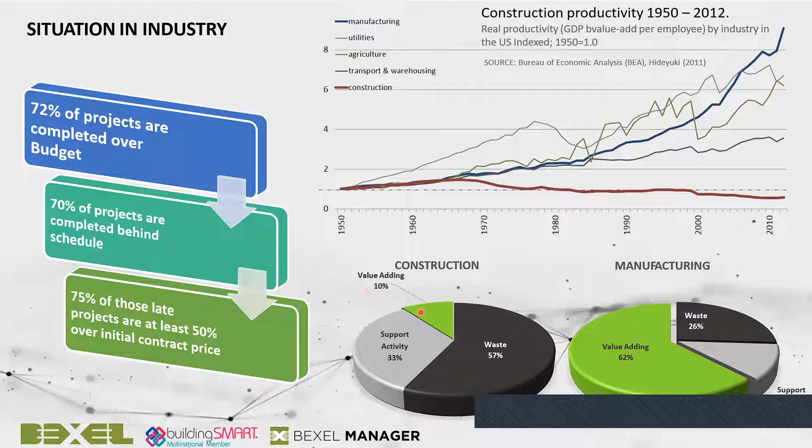If you see in terms of value addition in manufacturing versus construction industry, the value addition in terms of construction industry is just 10%. I'm saying about the intrinsic value, not the economic value here.

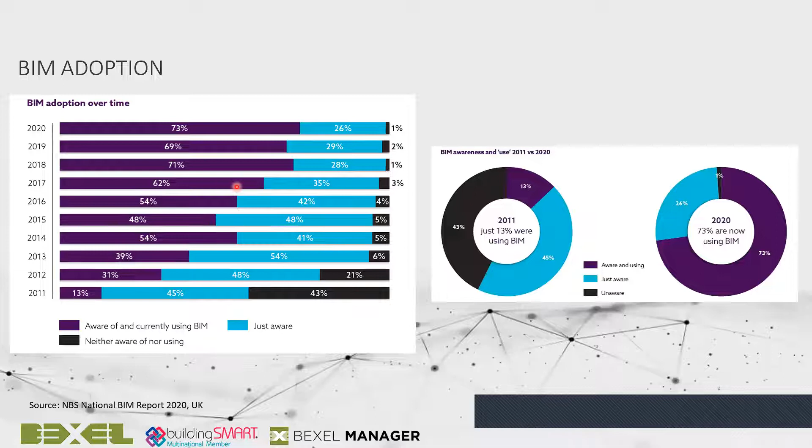Summarizing my initial introduction on what is the current scenario in industry and why digitalization, all those slides we covered are giving you insight into the current scenarios.

So what is meant by open BIM? Right now you have a multitude of softwares, and communication between one software and another has become very difficult these days. Building Smart has come up with a revolutionary format, IFC, Industry Foundation Classes. Across different tools, you can use this format to communicate in terms of the 3D model, schedules, or any other information pertaining to the 3D model. That is the idea of Building Smart - they want to standardize the construction industry in the long run.

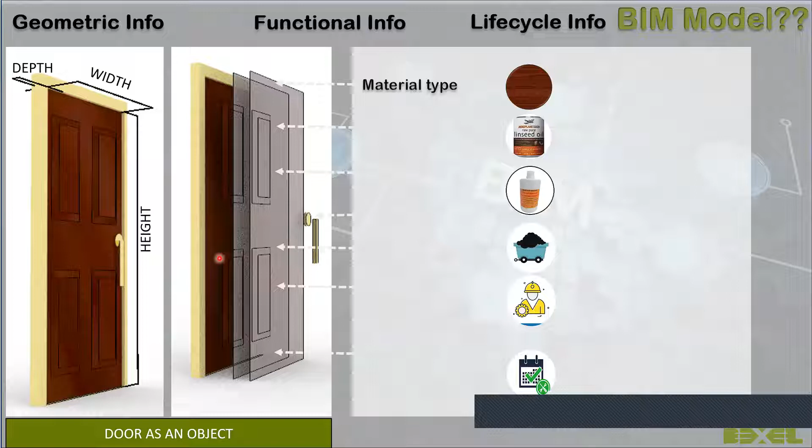With that, let me now jump to the software itself. Rather than just explaining in terms of slides, I feel it's better to go to the Bexel Manager software and explain there. We will be coming back to the slides again, whenever I feel it's done with the software. So this is a sample model.

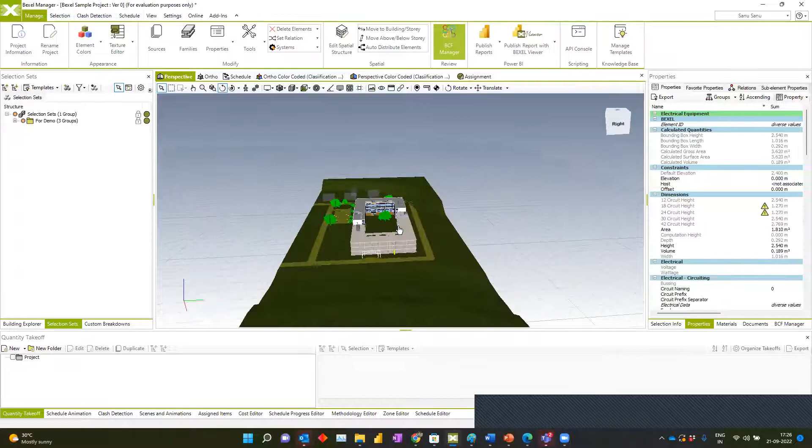Most of the time you've probably been fed up seeing this model - whenever you see any Bexel Manager demo, this model is shown, so kindly bear with us. Right now I'll just try to summarize the basic features of Bexel Manager and explain the intelligent scheduling part.

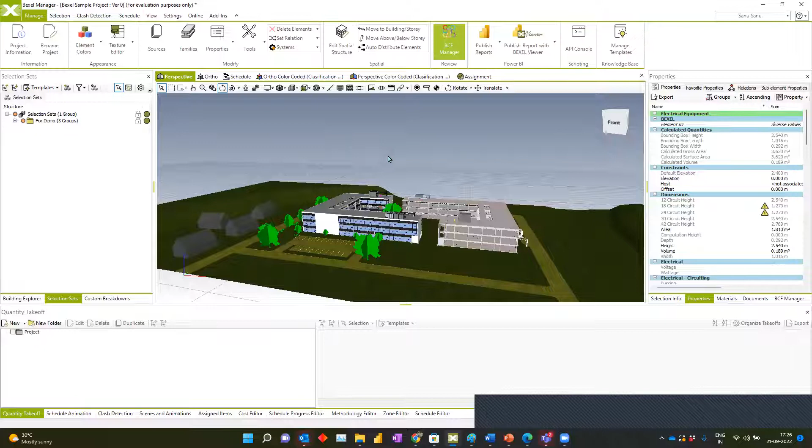So first of all, once you bring the model, what are the current formats that Bexel Manager can adopt? The basic formats are Industry Foundation Classes, IFC, and .bx3 files.

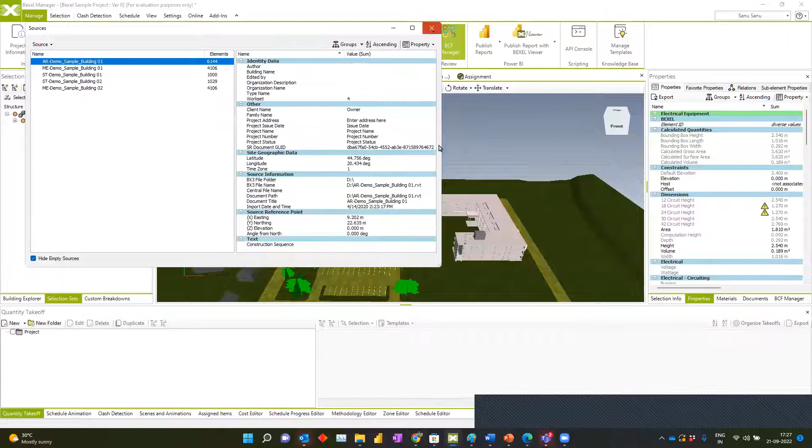Whenever you receive any 3D model, you can get a summary of all the files you receive here. All these are from Revit, extracted from Revit. Once you receive these, you can see all the source files - structural, mechanical drawing, architectural drawing. All these are present in the source file, so all the information or aspects related to the 3D model can be seen here.

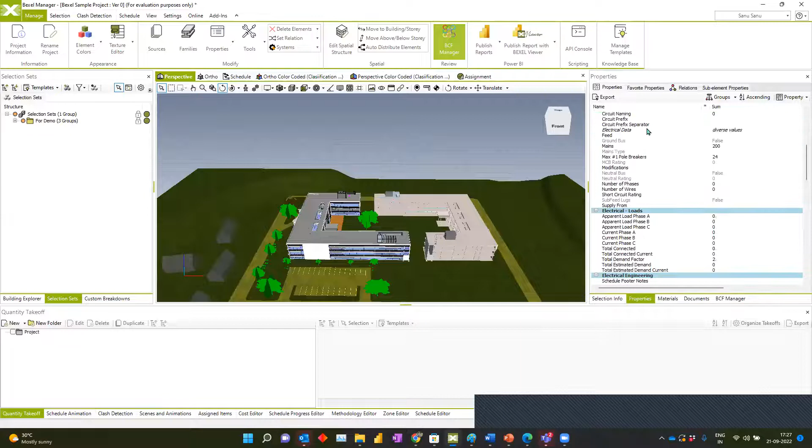Another important thing you need to understand in Bexel Manager or any other BIM tool is the properties - the 'I' of BIM, the building information, that information part. If you click on any particular element, you can see the complete history of that element, right from the time it is modeled to whichever stage it is taken to in construction or in the project. All this information is grouped under different groups, and you can see certain parameters here and a value for those parameters.

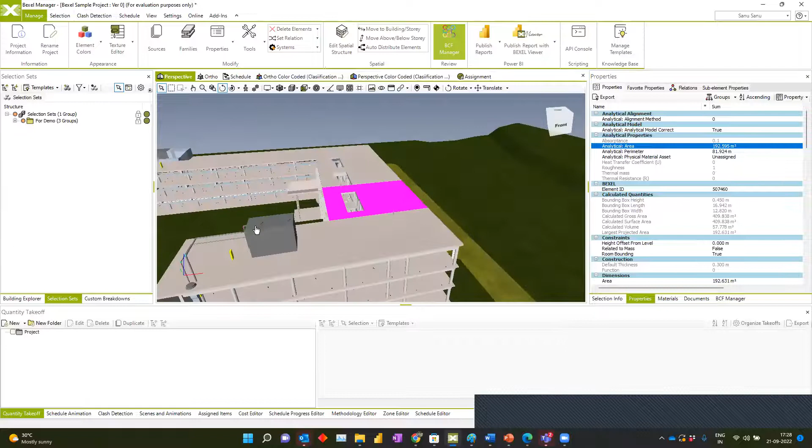This is why we say this is a building information model. You are punching in information to each and every model, whatever model is there, and you can see the information corresponding to that. It can be functional information, dimensional information, or any type of lifecycle information. All that information can be punched into this particular model.

So where is this information punched in? In the 3D modeling authoring tool - you have Revit, you have Civil 3D, those are modeling tools. The 3D modelers, when they model, follow certain criteria and standards, and also specific information needs to be punched into each and every element. Once you get this model, you can retrieve all this information here in Bexel Manager and do all the analysis with that data.

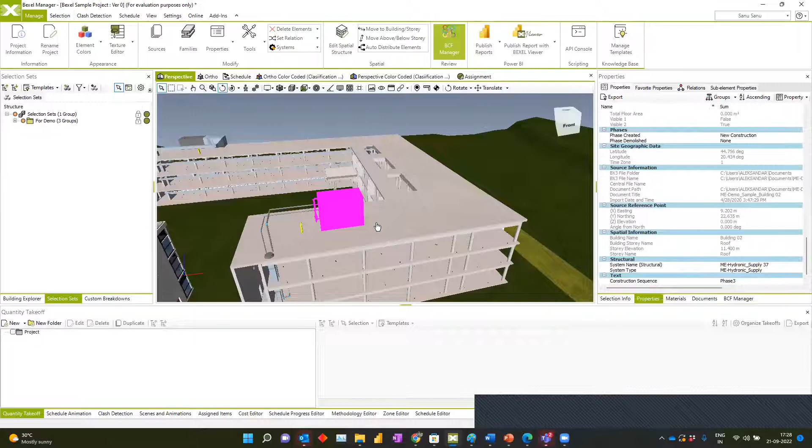Not to say less, we can also add this information in Bexel Manager. For example, if I want to add site construction related information, or structural related information, or any sort of information which adds more data to the 3D model, I can add it in Bexel Manager. That's one of the important things to understand - what these properties are and how you can use them to manage your construction.

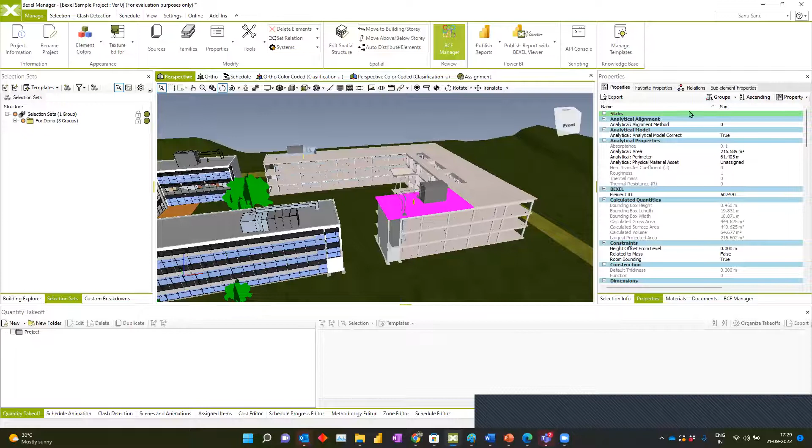Because say you want to take a quantity takeoff - what information will you use? When I click on the slab, I can see some dimensional properties. These are informations I can use to take the quantity takeoff. Say I want to take a clash report - what information is required? I may need the coordinates of this 3D model, the offsets from this 3D model to another element. All this information is what I make use of to create different outputs using this Bexel Manager tool.

Now coming to the other part - I think you already have clash detection, the quantity takeoff. Most of these parts have already been covered in the last two sessions, but however, I will just take an overview.

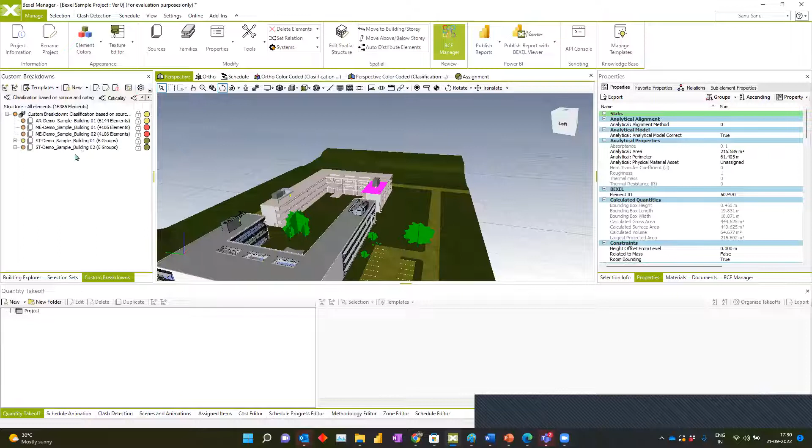Custom breakdown is nothing but a hierarchical breakdown of your 3D model. Say you want to divide this 3D model into phases or levels, like floor 1, floor 2. You can easily create a custom breakdown for level-wise information and create that particular scenario here. Custom breakdown creates a hierarchical breakdown based on the parameters.

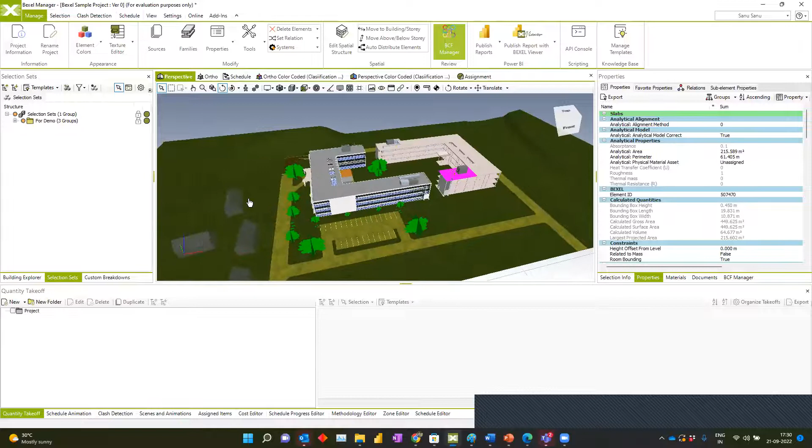Similarly, you have selection sets, which we will explain in detail just now when we create the intelligent schedule part. And similarly, we also have our costing part - this is another important aspect. In any construction, you want to deal with the bill of quantities, which is nothing but every item of your work listed down in line items, with a quantity.

So just like this, you are having a cost, you are having a quantity, and you get the total cost. It's nothing but unit rate multiplied by the quantity to give you the total cost. So on that line you get a bill of quantity.

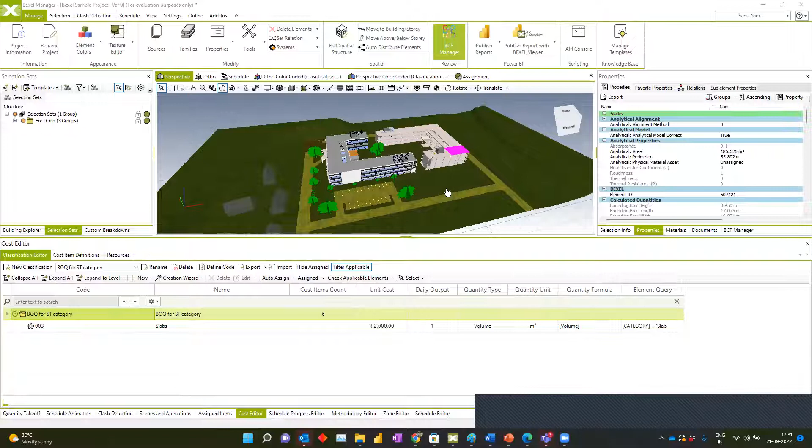In Bexel Manager we are having a very intelligent system for costing, and all these are integrated with the 3D model. So if I click on one 3D model, I can see which items are linked - if I click on a slab, right now it's showing the slab. So that sort of integration is happening between the 3D model, and that's why we call this an integrated 4D 5D BIM platform. You have the 4D connected, you have the schedule connected to the 3D model, everything is interlinked here.

Coming to the schedule animation, we will explain once we create that intelligent schedule. Also at the end, I will explain regarding the outputs in terms of Power BI, the dashboard that we can get from Bexel Manager.

So let me try to start with the intelligent scheduling. I will give you a glimpse of this scheduling feature - one of the unique features of Bexel Manager that you can't get across any other BIM-based tool, I will say.

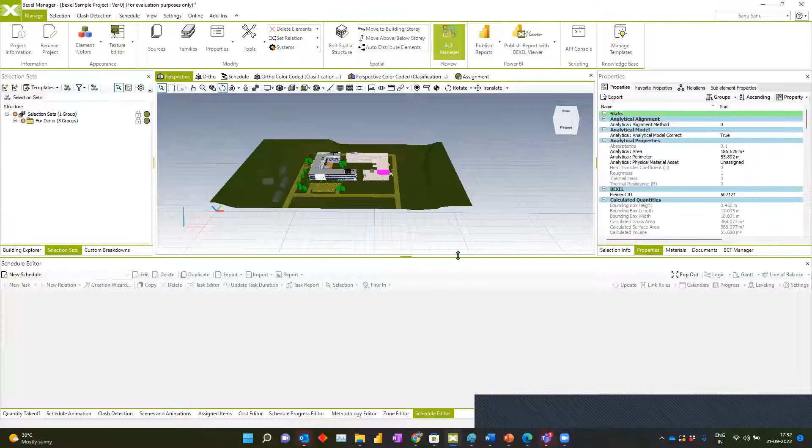So what you can do is use the 3D model to create a schedule just by defining some rules. For that, you require some parameters that I will explain. Ideally, in the traditional methodology, you have some tools out there in the industry like Primavera, MS Project, Asta Powerproject - all these are traditional tools which help you create a schedule.

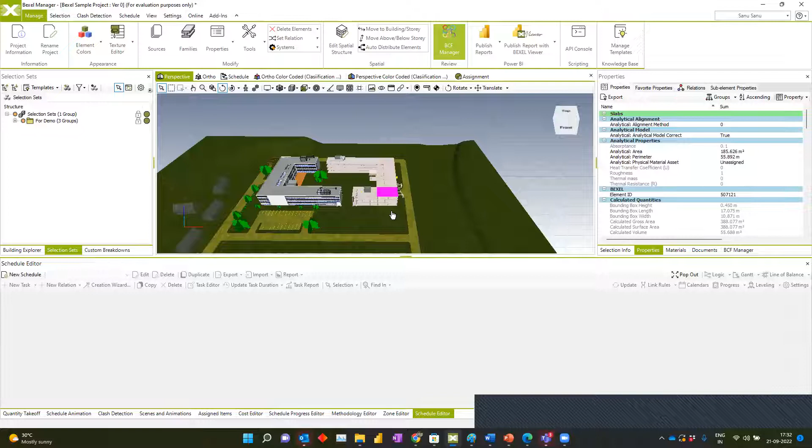But the methodology they follow is that whenever any project is there, they sit across and use their experience - that is one important thing. They put across different data like GFC drawings, CAD drawings, they interact with or use previous experience, previous projects, and put down a complete project. The main drawback of such a scenario is that it may take almost 1 to 1.5 months to get a detailed schedule for you.

But with the help of BIM models, you can generate this in less than, I will say, 2 days or 1 day, depending upon the complexity of the project. Here I will show you how you can create a schedule in just 15 or 10 minutes. So let's start that process without talking further.

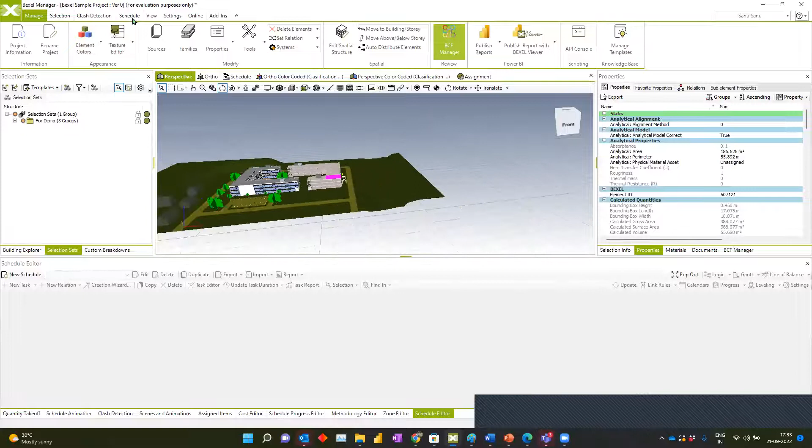So if you come here, this is the intelligent or rule-based scheduling module. You can see two things here - one is zone and one is methodology. These are the two inputs that you need to specify to the system to get that output - you are having zone, you are having methodology.

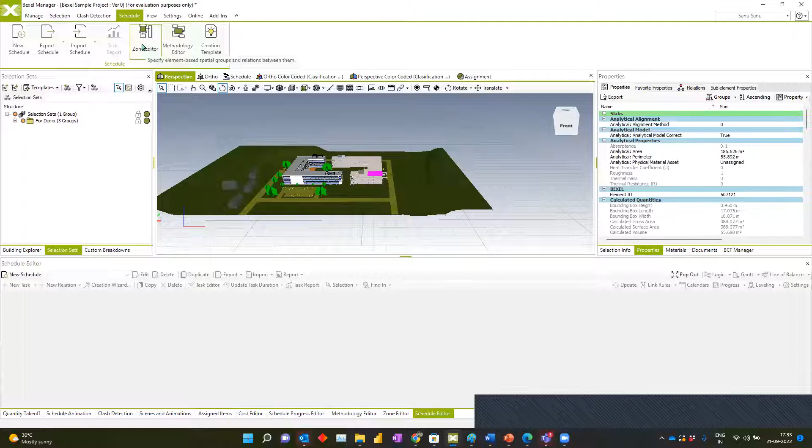So what is meant by zone? A zone is nothing but where construction is happening. For example, in this project, this is level 1, this is level 2, this is level 3, this is level 4 - so I can say that this is a zone. I can say that my construction at the moment is happening, this slab at level 3 is being constructed. So whenever I say 'where', that is where zone comes into picture.

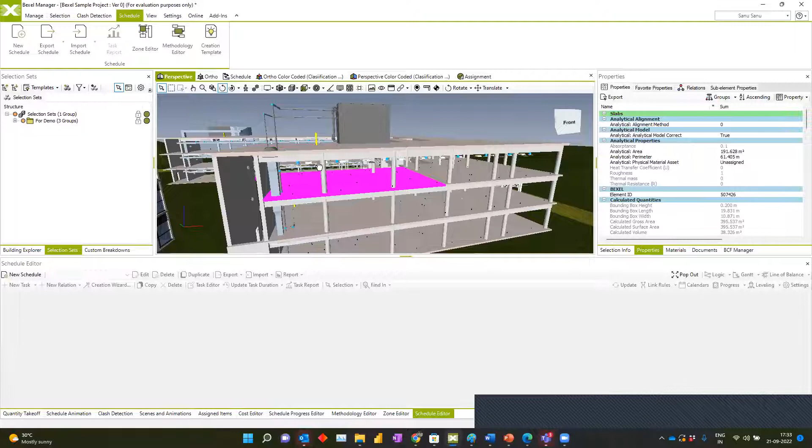So here I can say there are two buildings - building 1 is one zone, building 2 is one zone. I can also say this is phase 1, phase 2, phase 3 - so there are 3 phases also, from here to here. So you are having 3 zones here. But across the project, the zones can be different - there can be pour sequence, there can be construction sequence differently. For this sample project, we have divided this into 3 zones: one is the building, one is the zones, and one is the levels or phases.

How can we now create these levels and zones here? I will show one example, and from that you can get the logic of how we are creating that. For example, now I want to segregate out all the structural elements from this model.

So how can I do that? I just click on one element and see what properties are defining a structural element here.

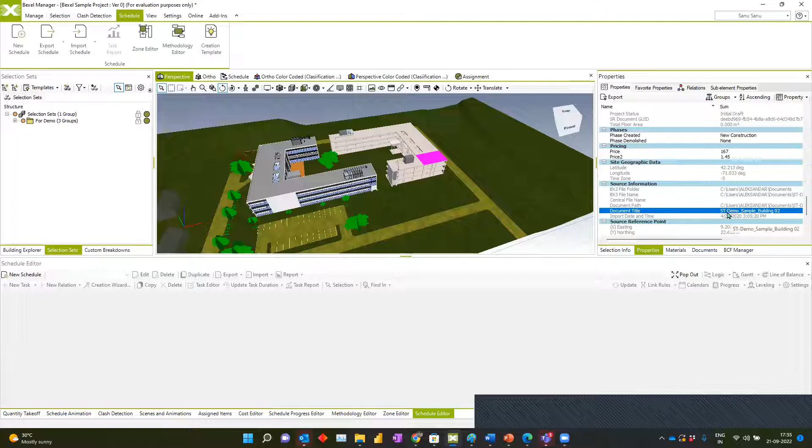Based on our experience, whenever we see a document title, like here it says structural demo sample building, whenever we get a Revit model or 3D model, ideally it's divided into structural, architectural, mechanical, etc. So in the document title itself, you get a property to filter out all the structural elements.

So how easy it is, I'll show right now. You can create an element query, go to element query, and this is nothing but calling out elements using a query. Query is something you give to call the elements. So I'll give some property value here.

What property did we just see? Document title. So I'll give document title, a text-based property, and say it contains ST, or begins with ST, because this document title value begins with ST.

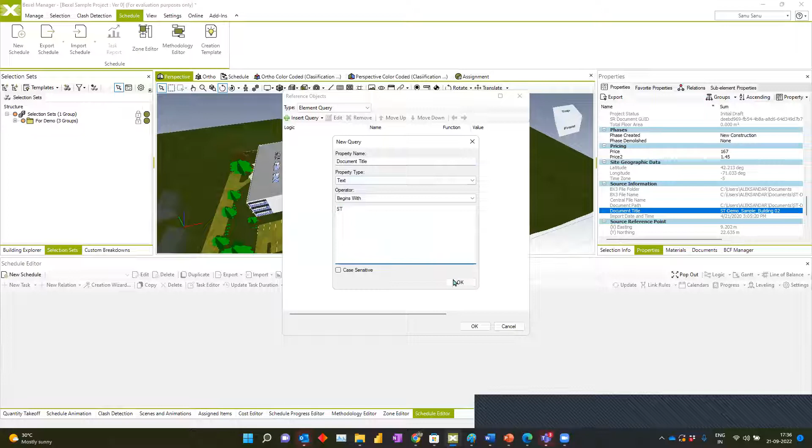So we are saying, filter out all the elements having a property called document title which is starting with or beginning with ST. I'll click OK. Right now itself you see 2029 elements are being selected.

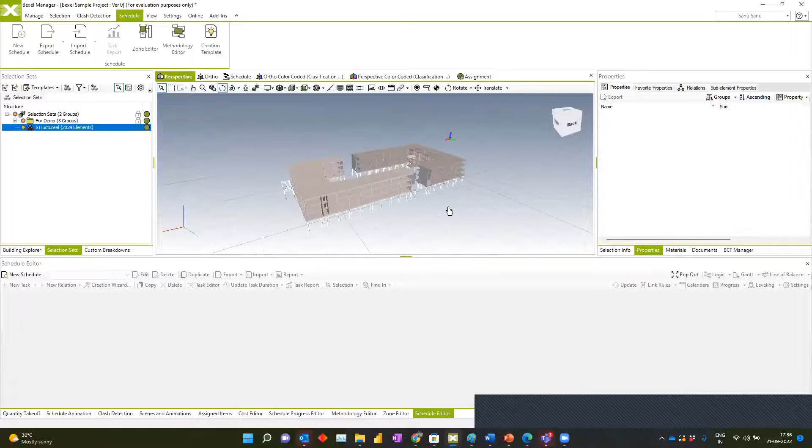I'll give this name as structural. So we created a selection set called structural. Forgive me for the naming, but if I select and isolate that, I can see the structural elements only in my 3D model. This is how you filter out or divide your 3D model based on information.

Again, I'm saying the importance of information in BIM, that information lies here, like all the data, everything lies in this part.

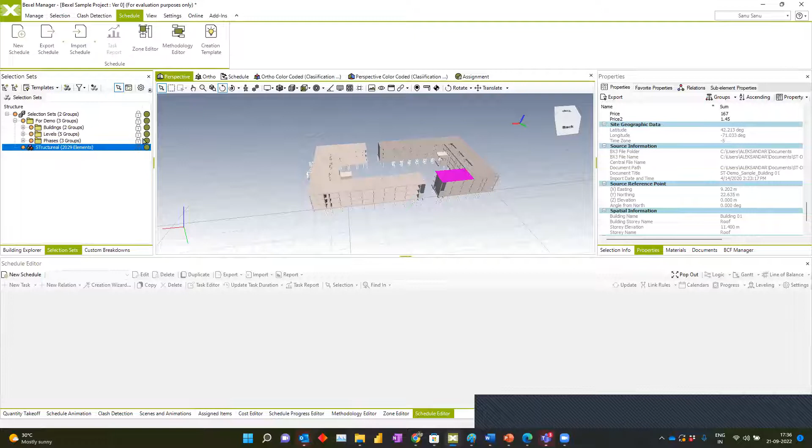Just like this, I created other zones automatically on similar lines. If you see, I've divided all the structural part into building 1, building 2, and the levels into entry level, sub level, floor 1, floor 2, all this level or floor information. Similarly, phases also, like phase 1, phase 2, phase 3.

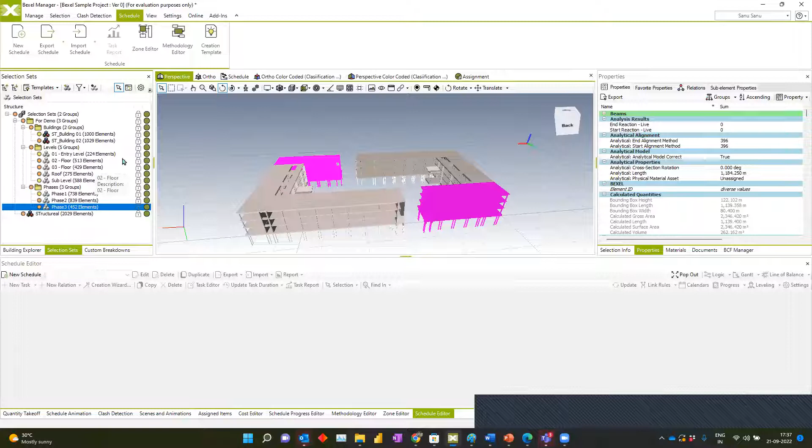So all these are informations, like the zones, that you can enrich into the 3D model, because we require this for our construction scheduling. So what you're seeing is BIM based or model based scheduling right now, that's why we are specifying all this in the model initially.

So next, now that zone is completed, what we require is methodology. Methodology is nothing but how we construct, or how we are going to construct.

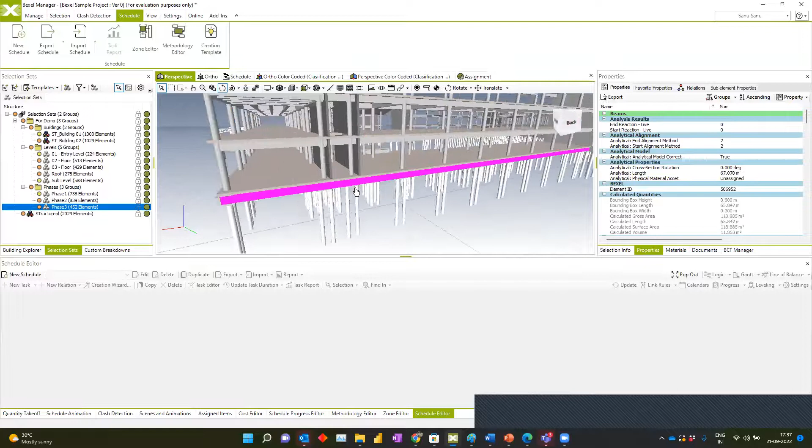Say you have the structural foundation, piles, then beams, then columns. Ideally you should construct the structural foundation first, then go for the plinth beam, then the slabs have to be casted, then the columns again. I'm saying this on a generic level, there can be more activities, but for this webinar, this is how it goes, and we are now specifying that work item.

Where do we get this methodology information? In all construction projects, there will be a BOQ, bill of quantities, which specifies all the items of work against the quantity. So on that line, we have to create a BOQ in Bexel Manager using this 3D model, and that is also very easy.

Come here, go to quantity takeoff, take a quantity takeoff easily. What I'm doing is taking the structural elements right now, I'll bring all the structural elements, do a very basic classification, group everything based on category, beams, columns like that, and I will give a quantity called volume here.

So I'll just name it structural BOQ, something like that. Fine, press OK. So now you are having all the items under the structural model. So you are having beams, roofs, slabs, structural columns, walls - all the things are listed down here. Perfect. So now you have quantity.

So what else is required for a BOQ? I said that BOQ is a combination of the quantity and the cost. So now you need some cost also. So where will you get that? You have to now come and create a BOQ, a bill of quantity, I will say. It's also simple - like right now you already created the BOQ or the quantity takeoff, so from there you can automatically retrieve the items and just punch in the unit rate. So I'll just sample a BOQ.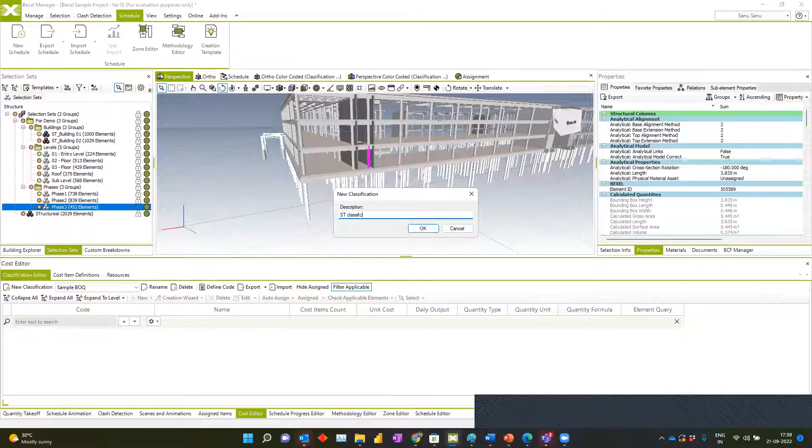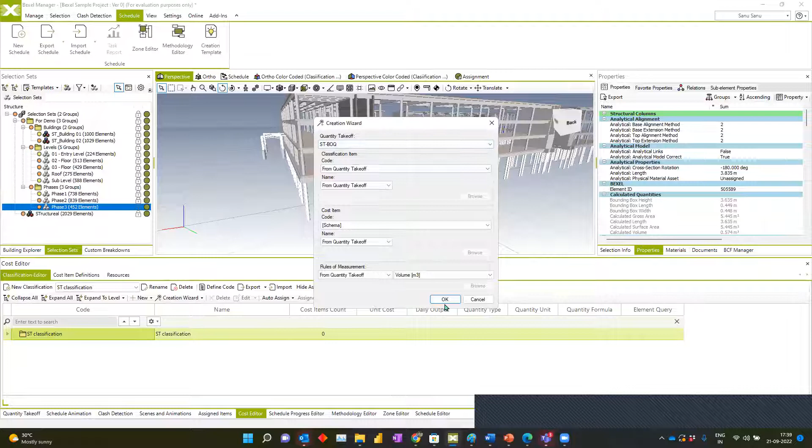So I'll just bring a new classification. I will name it structural classification. Fine, so now I will just bring that quantity takeoff that we just created right now - STBOQ, this is what we created now. So all these features, don't worry now, later you can understand what all these are. Just press OK, so now you can see all the items of work are listed down here.

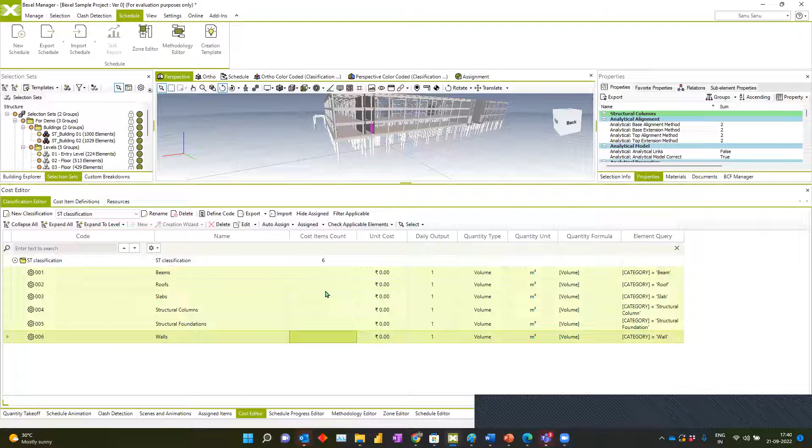So now what else are you having? You are having that quantity information here - volume, meter cube, etc. You can see element query. You can also see a column where you can punch in the rates for the items. So let's just give some dummy cost for now, say something like 2000, just like that.

So what all I said is required for a BOQ - you need a cost, you need a quantity. Quantity already we got from the quantity takeoff, so that's why these quantity formulas are there. Right now we gave just a unit cost also, so right now we are just assigning it.

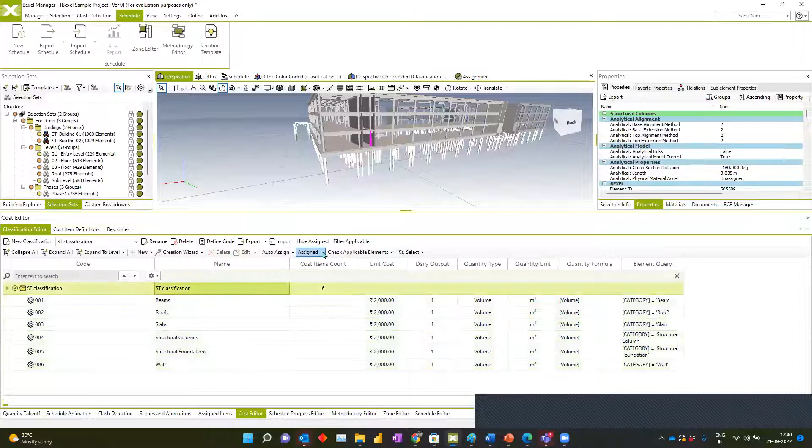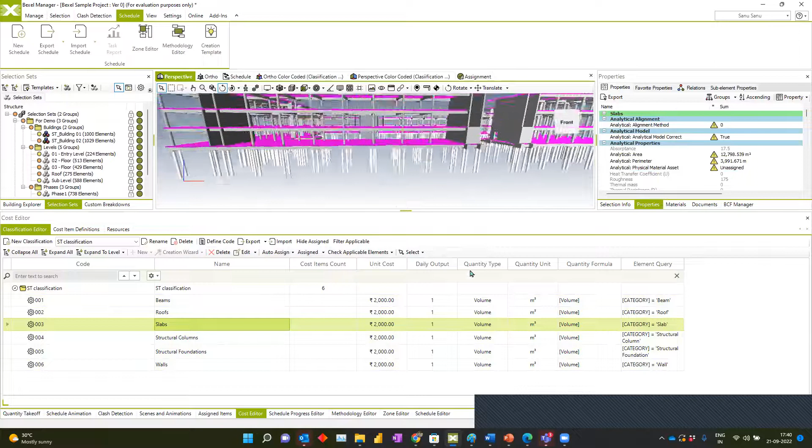So assigning means nothing but you are now converting these queries to the element. Like you are saying, okay, slabs is there - so once I assign, I can identify what element it belongs to. So if I go here, select applicable elements, I can see that all the slabs are now selected. Similarly, if I select any columns here and select filter applicable elements, the columns will be selected right now. So this is the integration that I am talking about - why we say that we are an integrated 4D/5D BIM tool like this Bexel Manager.

So now we got two things that are required - one is the zone, we created the zones here, and now we got the methodology also. So now let's just go and make that schedule.

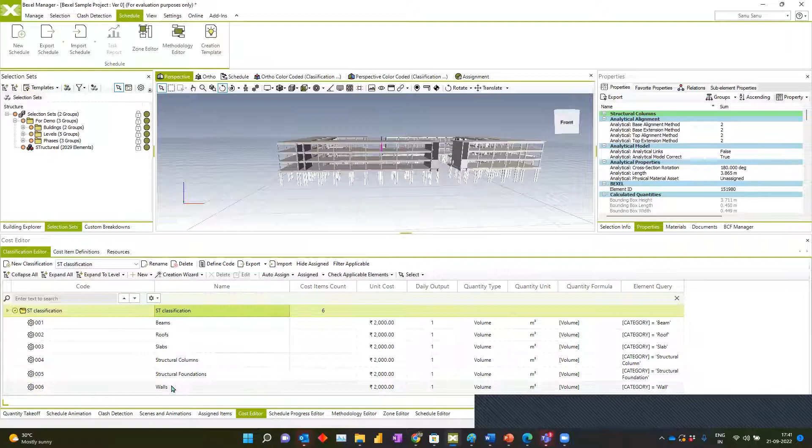So we created the methodology. Now we have to say to the system how we got the item - fine, we got the item, but now we have to say to the computer how we are going to actually schedule that. So for that, you have to come here. I have already created a schedule here, so we can use that right now. It's nothing but we just have to come to the item, the quantity or the BOQ we just created, and just create that item of work here. So it's as simple as that.

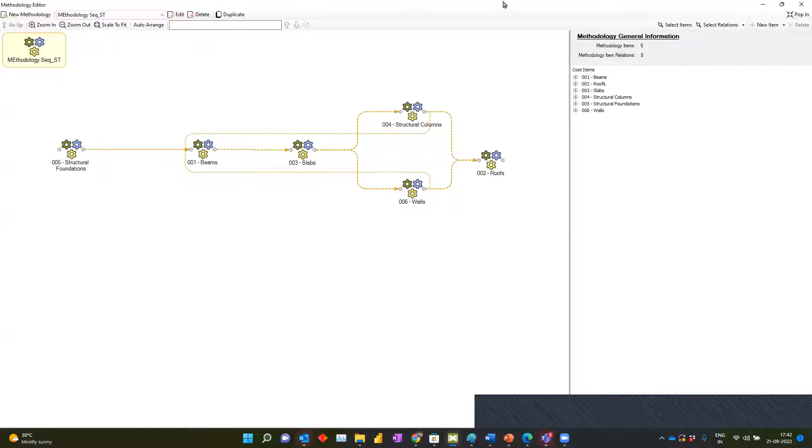Another thing to note here is that once I mention one item of work like structural foundation and beams, there is a relation between structural foundation and beams, I'm saying. First you construct my structural foundation, after that you start my beams, after that you start my slabs, after that you start my columns and walls, and then once that is constructed, you go with the roofs. So basically this is the general methodology that we are saying to the system that this is what you have to follow, and this is a rule that we are giving to the computer.

So now once that is done, we created the methodology. We initially created the BOQ, and we also said to the system how that BOQ has to happen, how that simulation or sequence has to happen. Now, similarly on that line, we have to create for the zones also. So let me come here and create that zone.

So we have to create 3 zones - one is for phases, one is for buildings, and one is for the levels, I will say. First of all, for the levels, let me come here and create that. So I'll just bring the levels information from the selection sets - so these are my levels, all these are my levels. Fine, press OK, I'll say create relation automatically. So some issues there.

Yeah, so let's continue there. Just have to go to the schedule and zone editor. So already the levels have been defined here, linked. I have to go to the selection sets, bring the selection sets here. I'll just create relations, press OK. So we have that relation created here automatically.

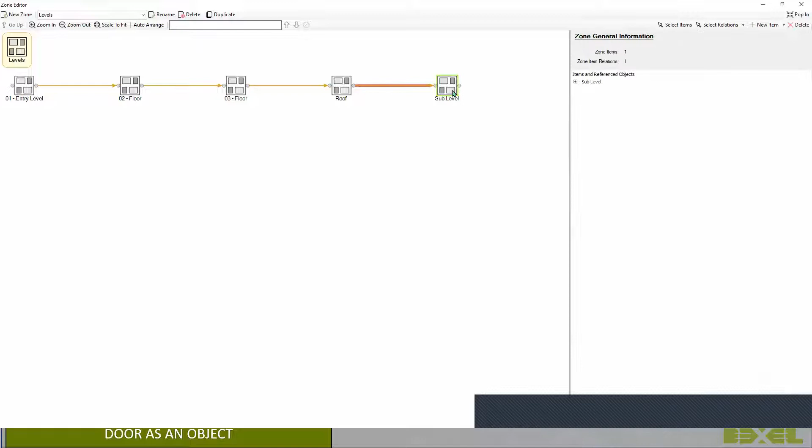So you are having that information here. Only thing is that this sub level is wrongly assigned here. Just delete that relation, bring it here and say that first you want to construct your sub level, then entry level, then the second floor, third floor, and then the roof.

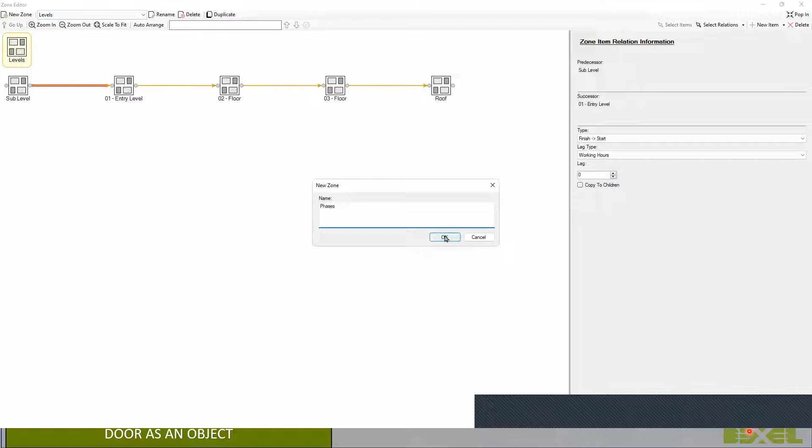Auto arrange, just say fine. So now the next zone that we have to create is two more zones. One is for phases and one is for the buildings, I will say. So first of all, for the phases, I will go and create on that line for phases. So already we have created here, 3 phases are there.

I'll just type create relation. Okay, phase 1 to phase 3. And then I will create one more zone here, that is the buildings. So again, link, come to the buildings, say fine, press OK, create relation, press OK. So building 1 and building 2. So now I can say that building 1 and after that building 2 is happening.

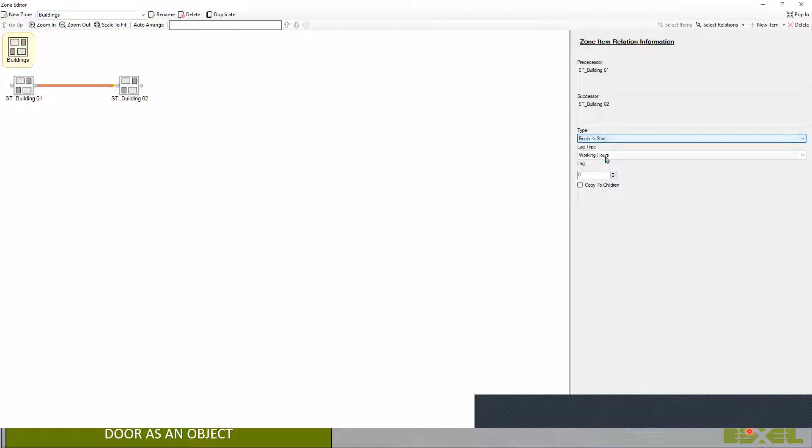No, I want to say that I want to change this relation to some other thing. So I can say that this need not be finish to start. This can be start to start, so that both the buildings can start at the same time. And I'm just giving a duration percent, some lag of something like 30%.

These are not big technical things, I will say, just minute technical things. Like I will say, after structural building 1 has happened, after that 30%, like 30% of structural building 1 has completed, then only you start my building 2. So that is what we are saying to the system right now.

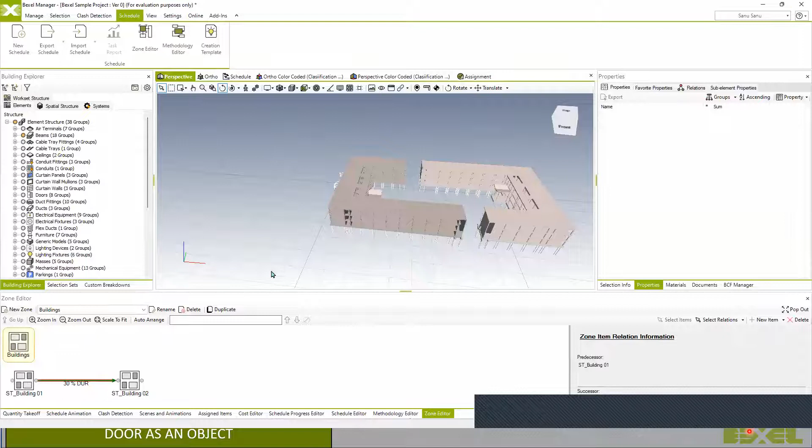So right now we have made all the connections here, I will say. So we are having the methodology, so the connections are being given correctly here. So it's perfect.

And right now, the only thing that we have to see here is to create a creation template right now. So we are having the methodology, we are having the zone. So the final thing is to give the hierarchical order in which this particular template, or that methodology and zone, is being listed down. So let's create a new template for that.

So I will go with the methodology first of all. So this is a methodology that we created right now. Press OK, fine. And now we also have to bring the zones also there.

So we created 3 zones. First one is the buildings. I'm bringing the buildings, then the levels is there, bring the levels, and then finally the phases also is there. So you are having three things: the buildings, the levels, and the phases. So bring the buildings up, the methodology second, the levels the third, fine, like perfect.

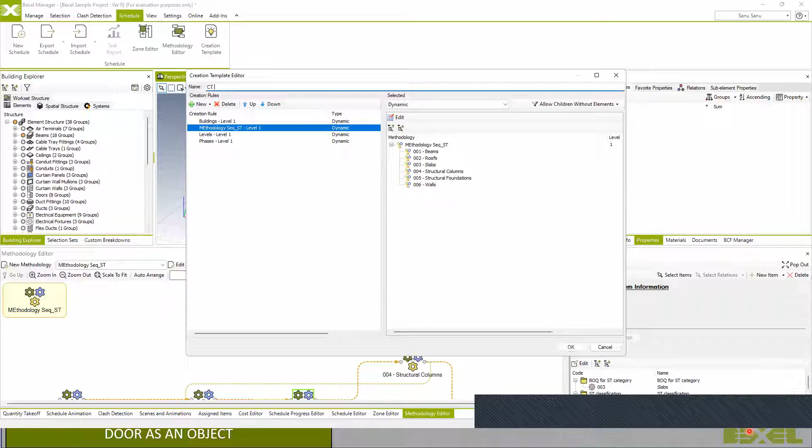So all these are now aligned: levels, phases. Now just go there and specify, okay, what is the name of the creation template? So I'm just giving that this is CT1, press OK, close.

And finally, just one basic thing I have to do. I have to make here, I have to give that another option. This option is to ensure that the logical sequence is being followed.

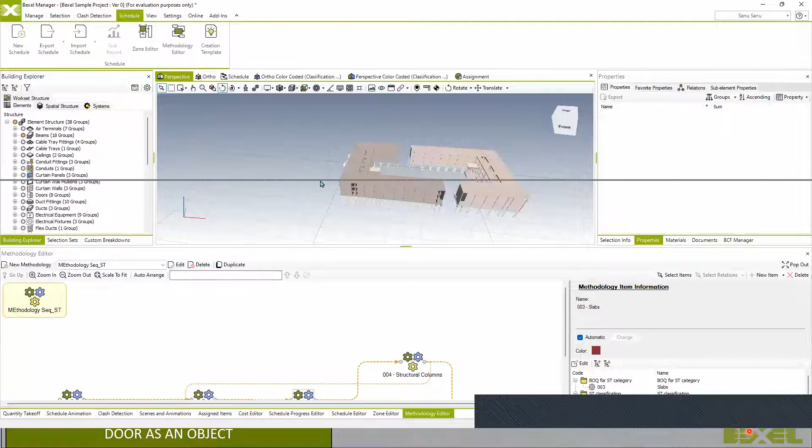So everything is perfect. Now let's go and create that schedule we're trying to build. Go to the schedule editor, new schedule, and give the schedule name and the basic course version. Just understand this process and see how the schedule is being created.

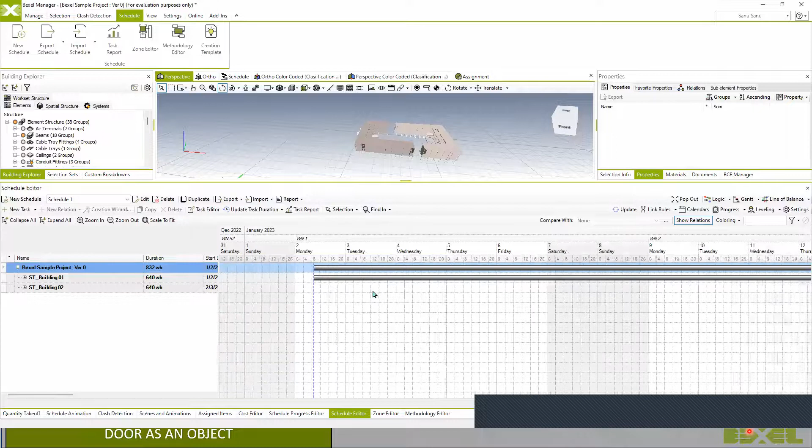So how do we specify to the system that we're getting a construction program for the structural elements? You tell the system that after building one is completed, 30% after that, you start building two, and the system behaves exactly the same. Under that, you have structural foundation, beams, slabs, columns. So how is this being constructed? After the structural foundation, then the beams, then the slab, then the columns, then the walls, roofs, whatever it may be.

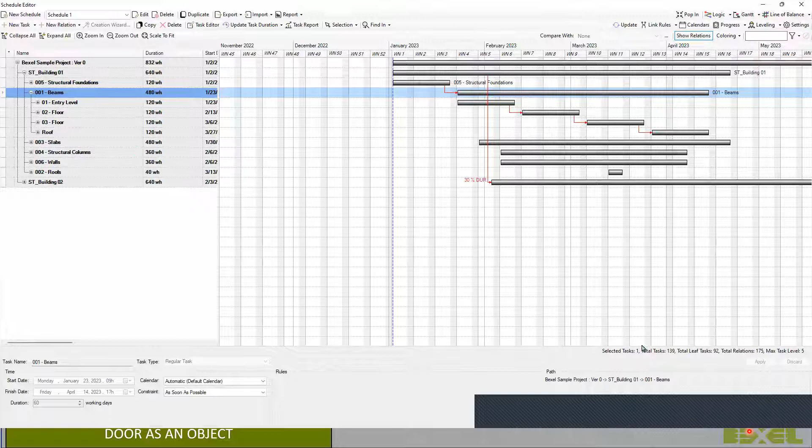So you are getting a construction schedule having almost 139 items. All these items are nothing but an activity which has a duration. Also cost is assigned to that, as well as what activity it is. So this is nothing but a construction program, I will say.

It will take a lot of time to create such a schedule in Primavera or MSP, and to create a 4D. That is just a schedule. Now to link that to the 3D model in any traditional tool, it will take you a lot of time.

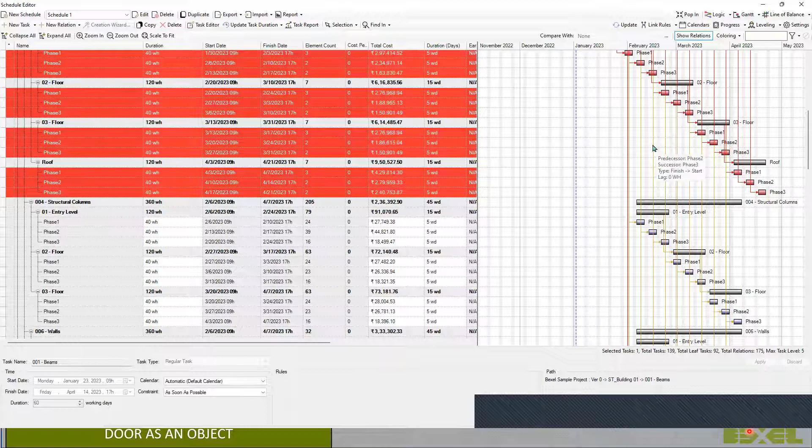So right now, whatever 3D model you're seeing here, this particular schedule is connected to the 3D model. For example, if I select this particular thing and go to selection, select elements, you can see that it's connected to that particular element.

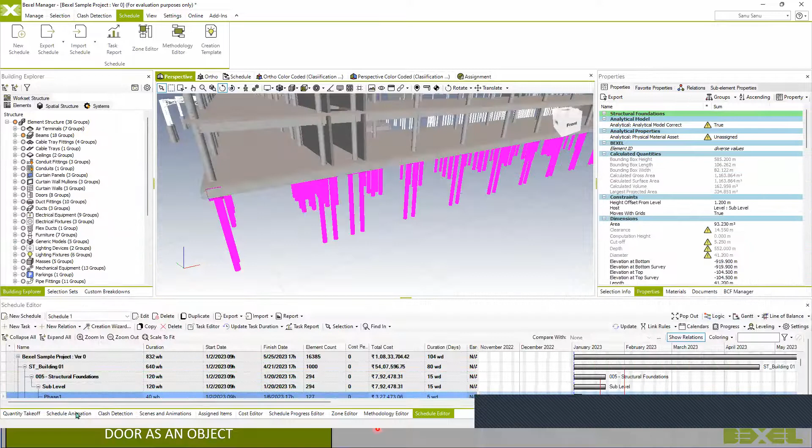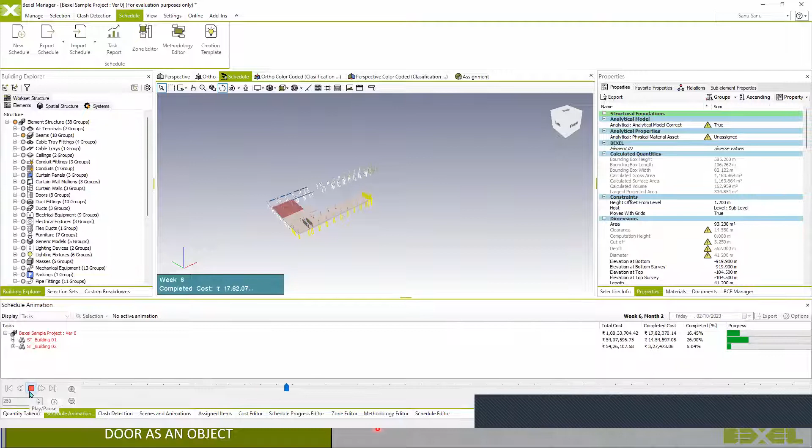So now let's go and see the animation, how it looks. Initially building one, phase one, the foundation is being constructed. After 30% of that time, building two will happen also. Just see that. Now building two has also started. So see how logically this sequence is going on.

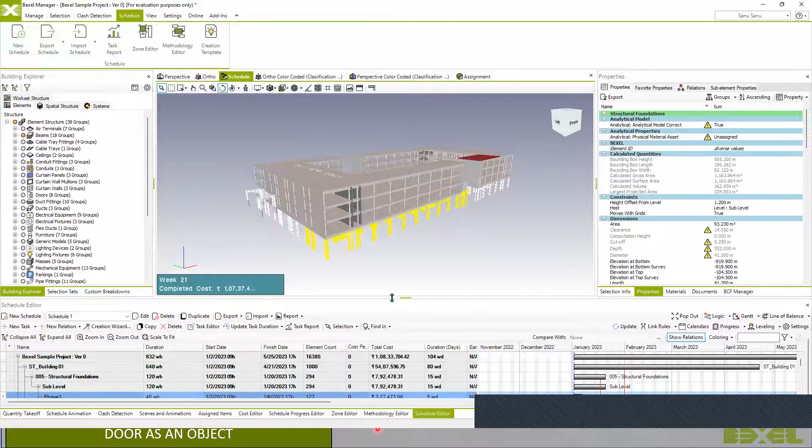You can see the cost, you can see the week in which it is happening. All that information is listed down in this animation screen. Whatever animation output you're seeing is created based on the rules we specified to the zone, based on the methodology we created, and finally the schedule we created based on this output. So this is how easy it is to create a 5D animation in Bexel Manager.

So how long did it take? Less than 20 minutes, I will say. We created a schedule for the structural part. I hope this is somewhat technical to you, like methodologies, zones and all, but I hope IPMCS is really capable of giving you complete training on this and equip you with all these techniques and technologies which can take you forward in the new age of construction.

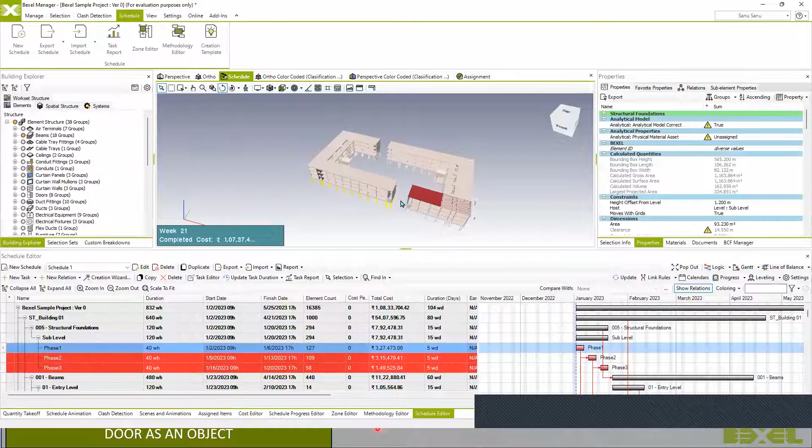After that, I will also show some of the reports in Bexel Manager right now, along with some new cloud-based tools that have been released by Bexel Manager. So let me take...

I hope the system has crashed right now. Let's see. Okay, so I will initially show you Power BI, and then we can come back here and see this.

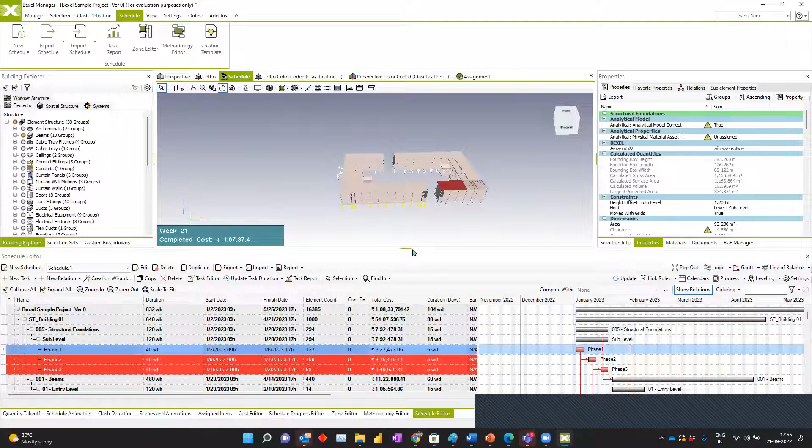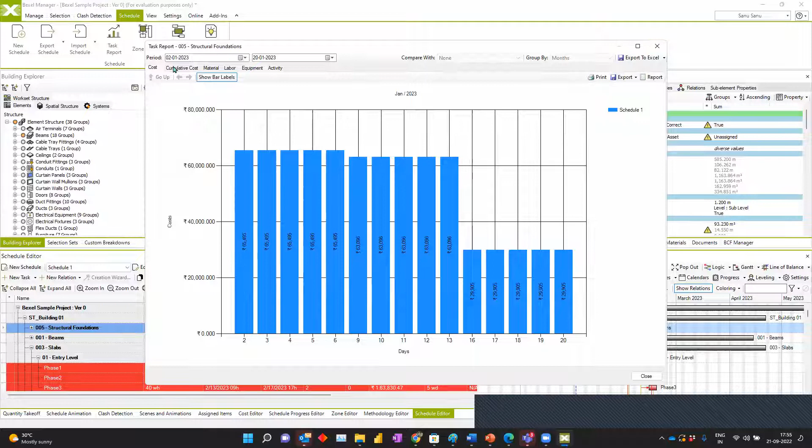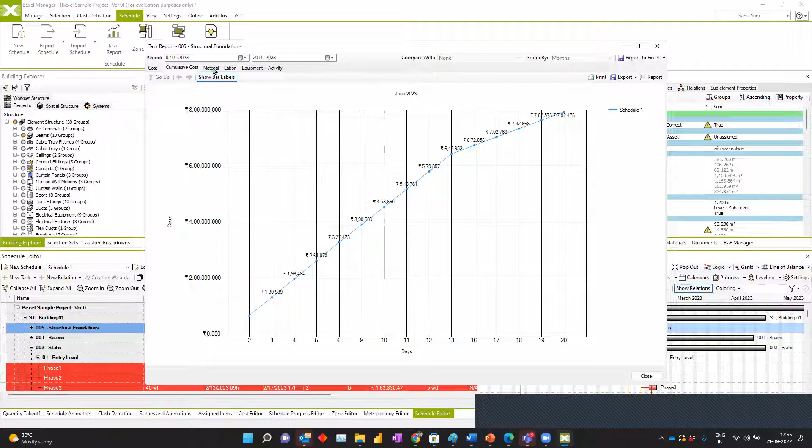Coming back, I'd also like to show some of the reports you can get in Bexel Manager - you have task reports as well. Let's see what those look like. You click on an activity and you can see the cash flow for that particular item, the cumulative cost. This ideally should be in the S curve - if you take the project from the initial stage, you can see that S curve coming here, which is nothing but the cumulative cost. So on day one I have this much cost, and going forward, this is the cost for my project. And if you've given some resources, we can see those reports here too. So all of these are listed down in Bexel Manager, and this is the reporting feature.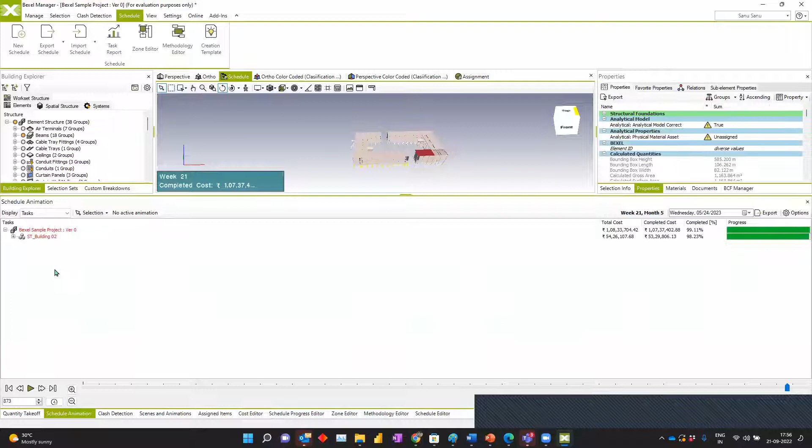Another output we already saw is the schedule animation. We can take exports of animations, and club that with the actual plan, all those things, to create an intuitive understanding of the construction.

Finally, something that might not have been explained previously - we also have a number of add-ins. As users, you can download these add-ins from our website user area, which IPMCS will also be sharing with you during the trainings. So all these add-ins can be downloaded from our user area, and you have delay analysis.

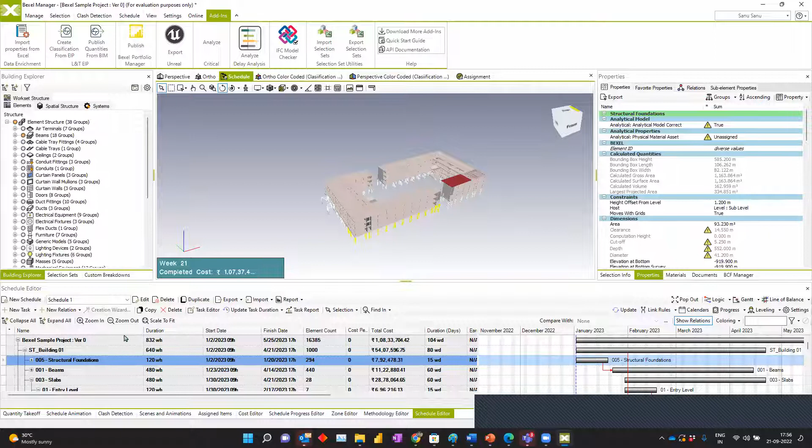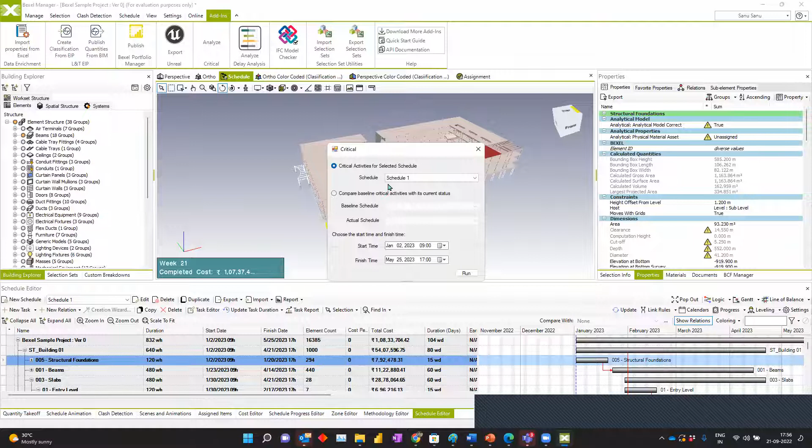So you can perform delay analysis. We just created a construction program, and now say we go to the site and monitor the construction - we want to understand whether this progress is going as per the schedule or not. For that, we can use delay analysis. We also have the option to filter out critical activities from my project. If I run this, I can see the critical activities - all the red colored ones are my critical activities. Previously, we had to go to the schedule to understand which was a critical activity, but now you get that information passed directly onto your 3D model.

So along these lines, we can have multiple reports or outputs created in Bexel Manager.